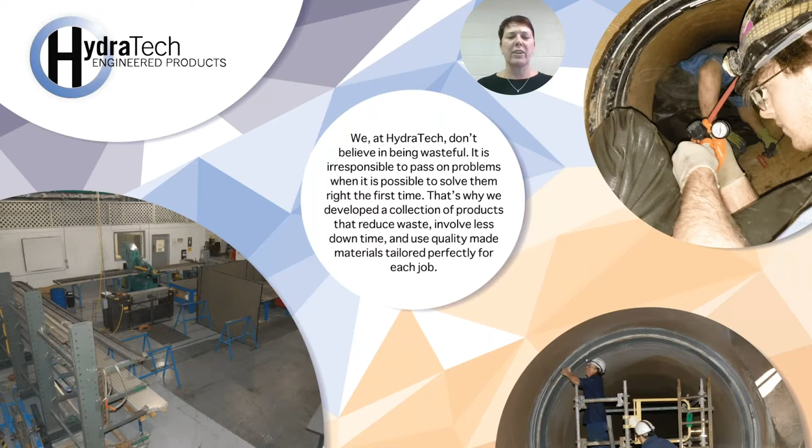So at HydraTech, we don't believe in being wasteful. We feel it's irresponsible to pass problems along when it's possible to solve them right the first time. That's why we've developed a collection of products to reduce waste, involve less downtime, and use quality materials tailored perfectly for each project. So today we're going to talk about the HydraTite seal.

So let's go over our agenda quickly. So first we're going to talk about what problem does the HydraTite internal joint seal solve? And what is the internal joint seal? We're going to then show a quick video on the installation, followed up by a slide that just hits the highlights. We're going to go over some examples, talk about some customized solutions, and then talk about a quick summary.

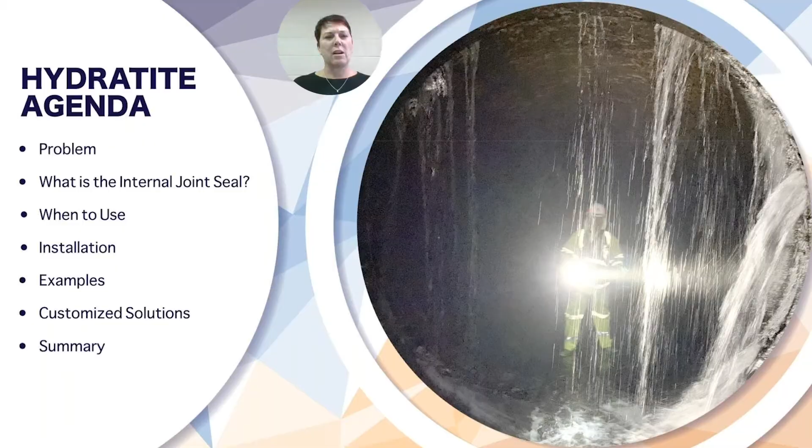So, problems. What does the HydraTite internal joint seal solve? First of all, offset joints and infiltration. Those typically come hand in hand. So when you have infiltration, you're washing soil and water from outside the surface into your piping system, which creates a problem. And then that can lead to sinkholes. And sinkholes are a problem for many municipalities, many state DOTs, and many systems. So those are problems the HydraTite internal joint seal can solve.

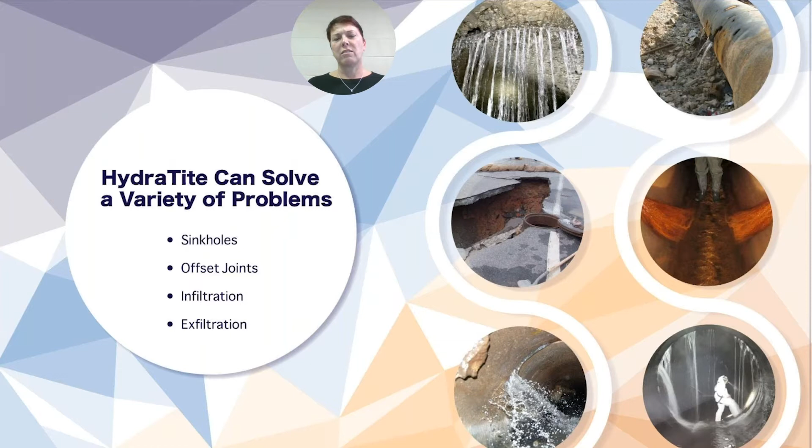Also, exfiltration. The upper right-hand slide shows exfiltration. You can see examples of infiltration by the 4 slides depicted in the slide as well. So what is the internal joint seal? Let's discuss this before we move forward.

The internal joint seal is a mechanical seal that has been utilized in trenchless remediation for decades. It is mechanical only. You would need to have structural pipe, solid pipe, in order to use this type of remediation. It has been around for years. It was originally designed and manufactured in Europe about 60 years ago. It was brought to the United States in the early 80s. So, with that being said, it has been around for a while and it is proven technology.

So what does the internal joint seal consist of? The internal joint seal is comprised of EPDM rubber and stainless steel. The EPDM rubber is available in 3 widths. You have standard wide, extra wide, and double wide. And that will be discussed in the next slide.

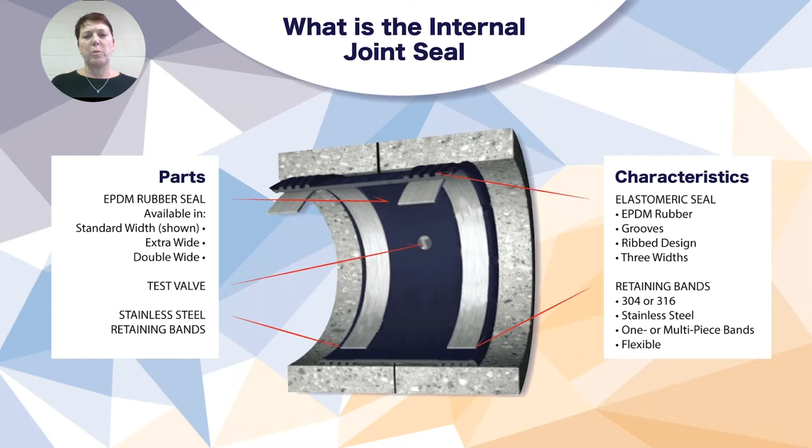It also has a rib design or grooves. And those rib tips are concave. And what that allows for is compression when the bands are compressed to the seal, and that allows for the seal to have a better connection to the host pipe. Test valves are also optional if you would like to have that included with your order. Also, the stainless steel retaining bands are 304 or 316 stainless steel, and they come in 1 piece or multiple piece and are flexible for installation.

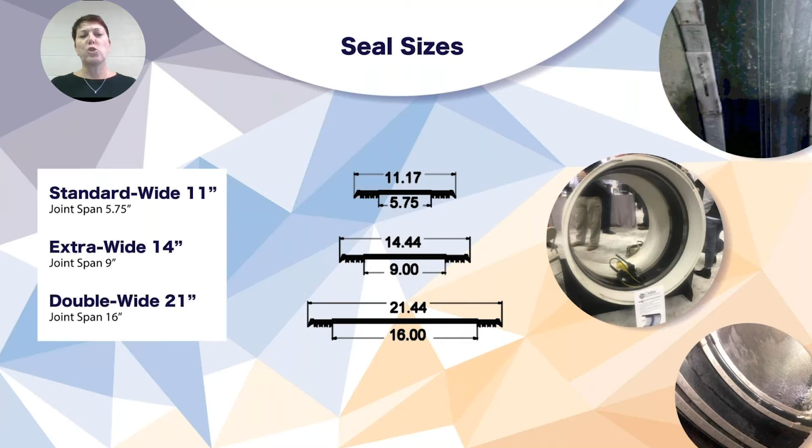As mentioned on the previous slide, we would discuss seal sizes. So the standard wide is 11 inches with a joint span of 5 3/4. That means that joint span would go over your joint or your area where you would need a point repair. Your extra wide is 14 inches with a 9-inch joint span, which again would go over your joint or area of point repair. And your double wide is 21 inches with a joint span of 16 inches.

So what size range can HydraTech accommodate? We can actually do 18 inches up to 24 feet. And the slide on the right shows you a 24-foot project that we just completed this past spring in Canada. And as you can see by all the scaffolding, what an amazing project that ended up being.

So some advantages of the internal joint seal: it is trenchless. So that means everything is done man entry inside the pipe. So that means no digging, no cutting, no restoration of grass, concrete, or asphalt. Everything again is done inside the pipe. It is customizable. Everything is manufactured at our facility here in Cincinnati, Ohio. So any size, shape, transition can be accommodated for. And it's nice that everything is also USA materials.

There's no hot work involved because everything again is manufactured here in Cincinnati, Ohio. All the cutting and welding is done in-house. And then when the crews get the final product, all they have to do is install using an expander, a pump, and basic hand tools. It does have a 50-year design life and service life, so it is a proven technology for 50 years.

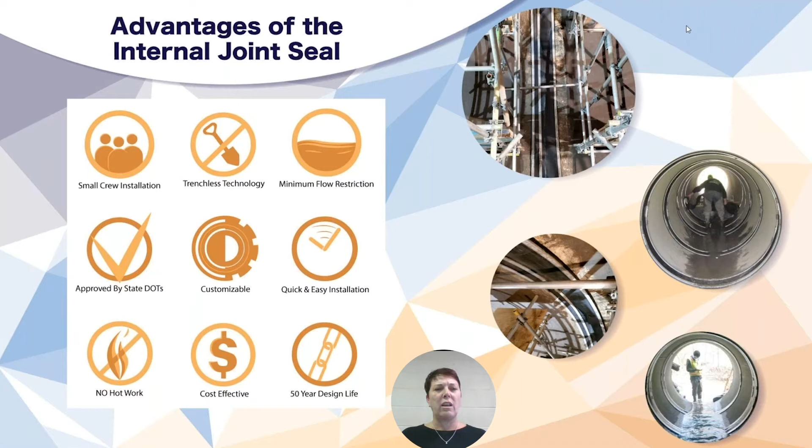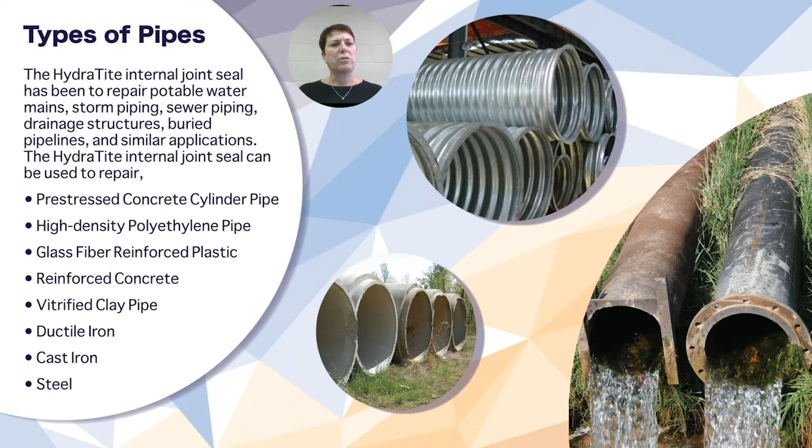It is approved by many state DOTs, and that list will be provided later on in the slideshow. So when do we use HydraTite internal joint seal? This is a list of the different types of pipe that the HydraTite internal joint seal can be used on. We have pre-stressed concrete, reinforced concrete, ductile iron, cast iron, and a variety of other pipe types. It can also be used on storm piping, potable water, sewer pipe, storm culverts, and various other types as well.

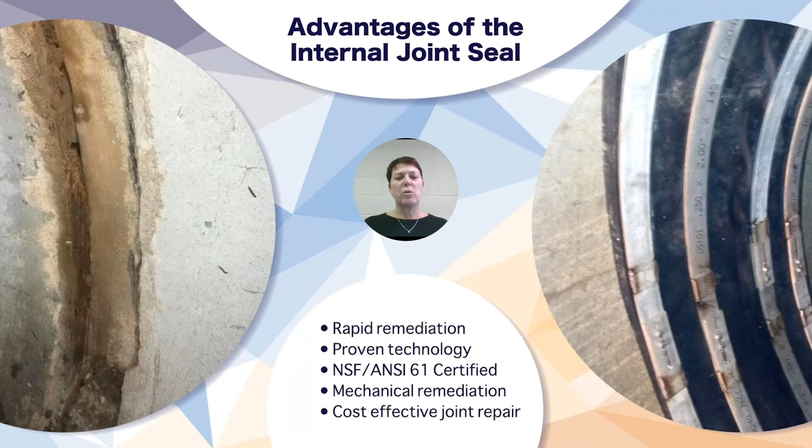So some advantages of the internal joint seal: it is rapid remediation. It's very quick. If you had 60-inch pipe, you would have a 3-man crew, one typically for confined space matters. With clean pipe and easy access, a crew could easily install 8 to 10 joints in a day. It is proven technology. Again, it's been around for over 60 years. It is NSF ANSI 61 certified, and it is mechanical remediation.

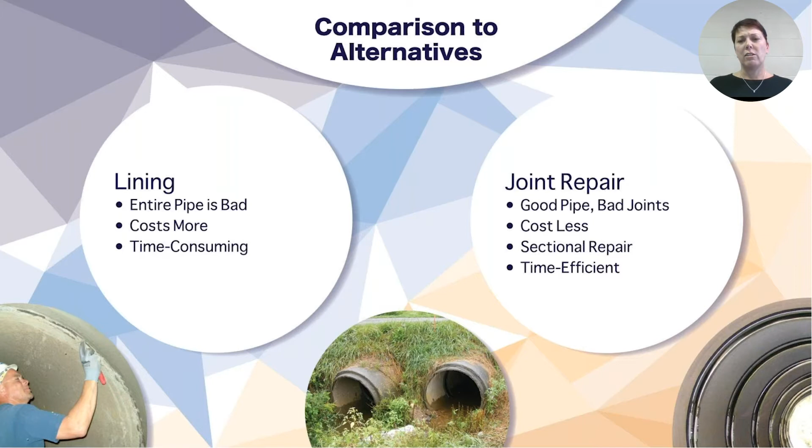So to compare this to alternatives, you would use the joint repair when you have good pipe and bad joints because it does cost less. You would line when your entire pipe is bad because it costs more and it's more time consuming. Joint repair can also be used as a sectional repair, and it's very time efficient.

Also, comparing to chemical grout, chemical grout is not a long-term repair method. It typically lasts 3 to 5 years, and it does cost more per service year. Another thing people don't know about chemical grout is it's not 100% watertight. Now, with the internal joint seal, it does have a 50-year repair method. It is a long-term repair method, and it costs less per service year. And not to mention, it's also watertight.

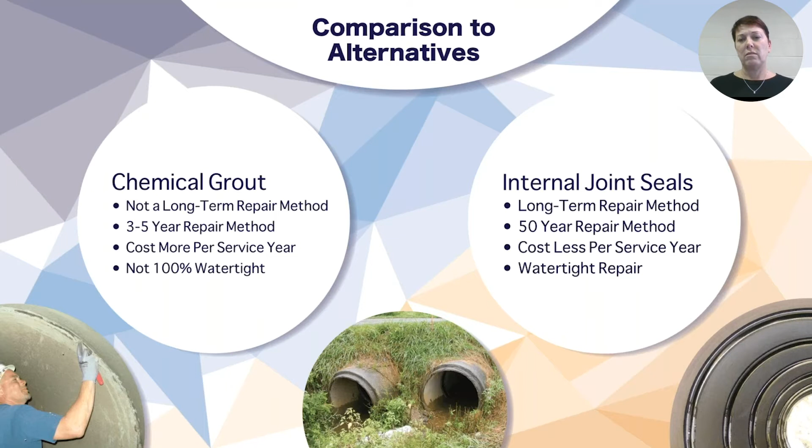So an example, comparing the internal joint seal 60-inch piece of pipe to chemical grout, these statistics are from 2020. If you have a service life of 5 years for your chemical grout with a $648 initial cost, that's $129 cost per service year. Comparing that to the internal joint seal that has a service life of 50 years, you have a $1,500 initial cost, which is $30 cost per service year.

So with that being said, the grout would have to be replaced every 5 years for 50 years, leaving it a cost of $6,480 compared to your $1,500 initial cost for your internal joint seal. So you can see how much more expensive chemical grout would end up being, and not to mention it's not watertight like the internal joint seal.

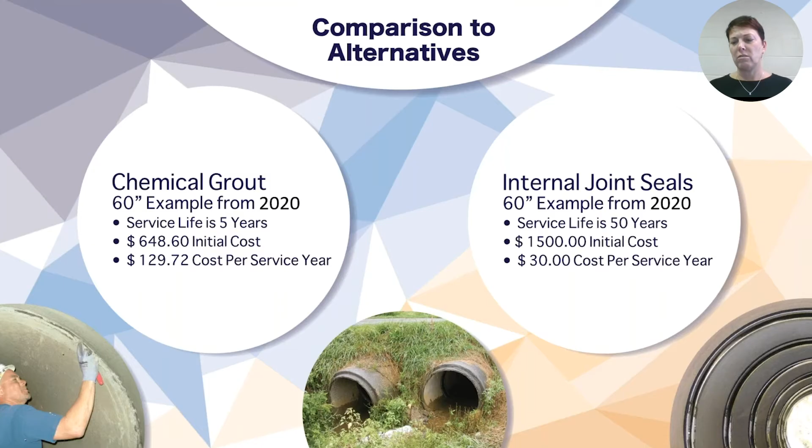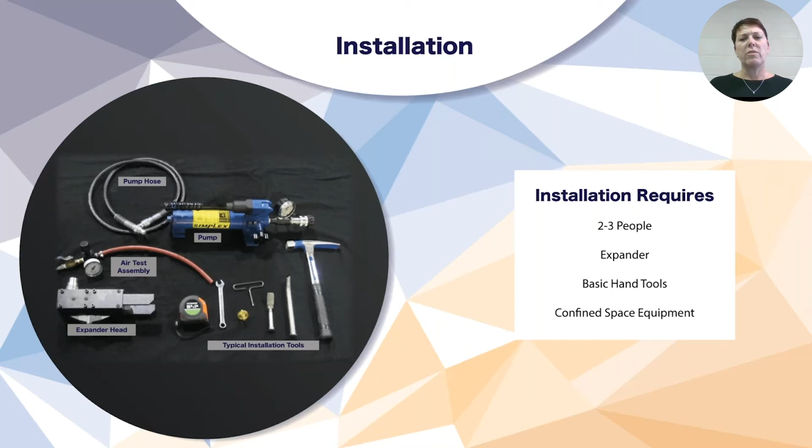So let's talk about installation next. Installation requires 2 to 3 people, mostly because it's confined space, 60-inch or less, and an expander, which you can see the expander there on the left-hand side of the screen. And it requires basic hand tools that you can buy from Lowe's or Home Depot. So now I'm going to show you a video that talks about installation.

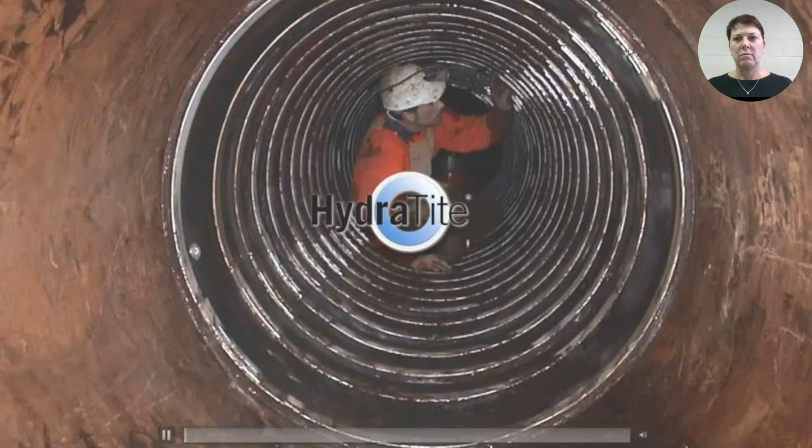HydraTite is an internal joint sealing system that offers customized mechanical remediation without expensive excavation. The HydraTite system offers a flexible mechanical trenchless repair with immediate return to service, minimum prep work, rapid installation with no hot work, and a design life of up to 50 years. With over 30,000 HydraTite seals in service, this technology offers a proven solution to the water, gas, sanitary, and power industries. The HydraTite system is a recognized method of joint repair by the AWWA M28.

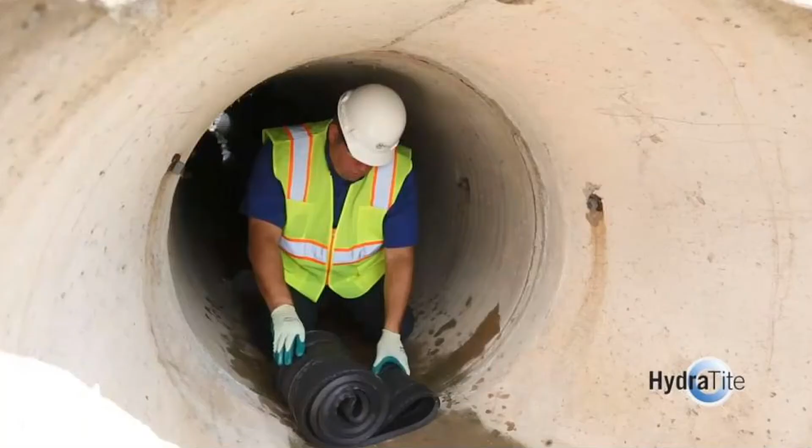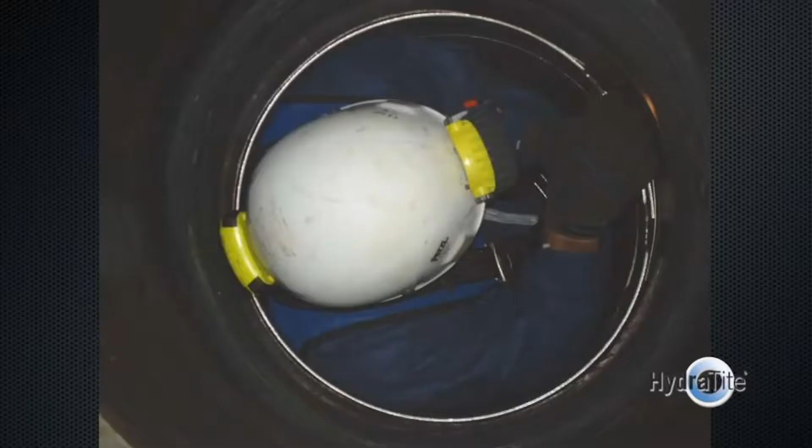The HydraTite system consists of an EPDM rubber seal, stainless steel retaining bands, and an optional test valve. The rubber seal is manufactured in one piece to match the internal diameter of the pipe. This system can be utilized in pipe diameters ranging from 18 to 218 inches. The seal is available in 3 different widths to accommodate a variety of joint dimensions: the standard 11-inch, the extra wide 14.5 inch, and the double wide 21.5 inch.

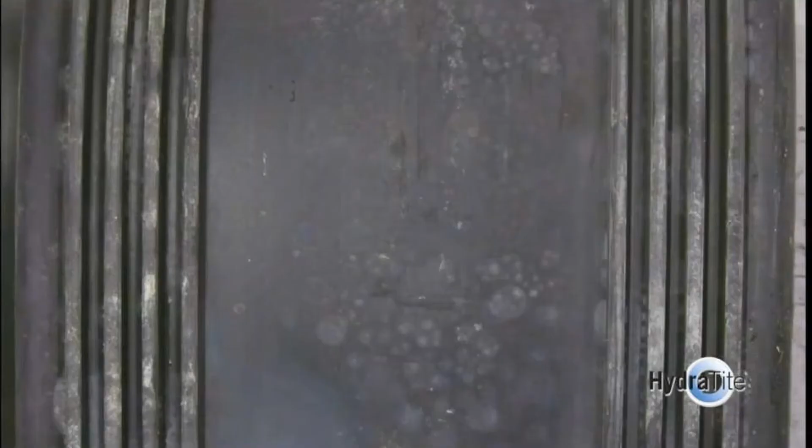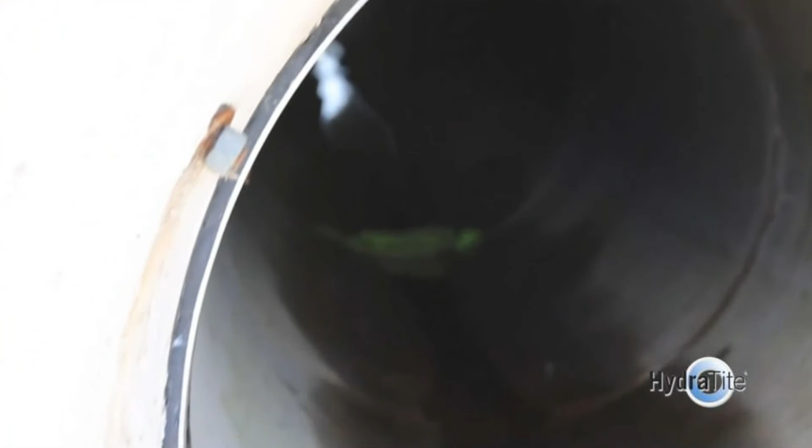HydraTite utilizes a rib design to ensure a watertight seal in the pipe. The EPDM seal incorporates groove channels to ensure proper seating of the retaining bands. Retaining bands are provided in one piece for small diameter pipes and multiple pieces to accommodate tight entries into large diameter pipes. The retaining bands are positioned on the seal, then expanded to compress the seal against the pipe walls. A wedge system is used to lock the retaining bands in place. This wedge lock system provides the greatest degree of flexibility while retaining the lowest possible profile.

As an option, the HydraTite seal is equipped with a stainless steel test valve to allow the installed seal to be tested for leaks before the pipe is put into service. Since installation is typically in pipes, installation equipment and procedures follow OSHA requirements for confined space entry.

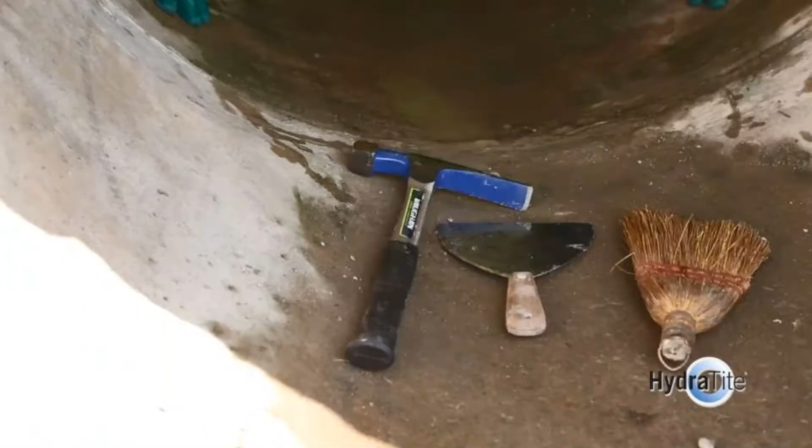Tools required for installation include the necessary tools needed for surface preparation, pipe lubricant, hydraulic expander, and an air test kit for seal testing, if applicable. The HydraTite seal is manufactured and installed in 8 steps.

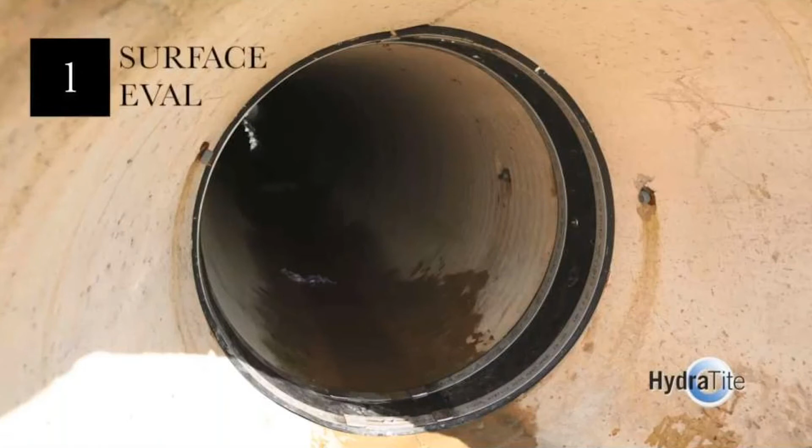The first step is to evaluate the pipe and operating conditions. Ask the following questions. What is the inside dimension of the pipe? What process fluid is flowing through the pipe? Is it a pressurized pipe or a gravity pipe? What is the gap in the joints or area of the joint repair? What is the surface of the pipe? Is there a significant offset in the pipe joint, and what type of access is required?

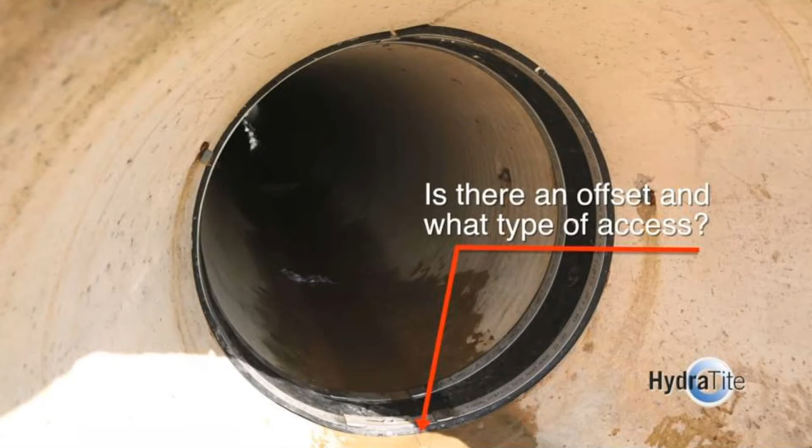This step enables the seal to be manufactured correctly. It defines the diameter of the seal, width of the seal, amount of bands required, material of the system, type of surface preparation required, and if the seal requires more than one-piece bands.

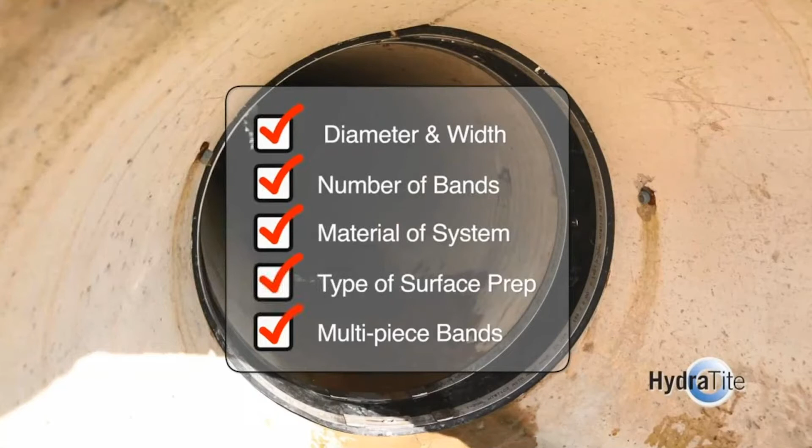The second step, once the HydraTite is manufactured, is to prepare the surface. The surface area where the joint is to be installed should be cleaned to ensure any loose debris, scale, or corrosion products are removed. The intent of the cleaning is to have a smooth, stable surface so the rubber will provide a good seal.

The third step, once the seal assembly has been loaded, is lubrication. The HydraTite seal, in many cases, needs to be lubricated on its sealing surface to assist in adjusting the rubber at the joint. Make sure the seal is parallel to the joint. The fourth step is to install the retaining bands in the grooves of the rubber seal.

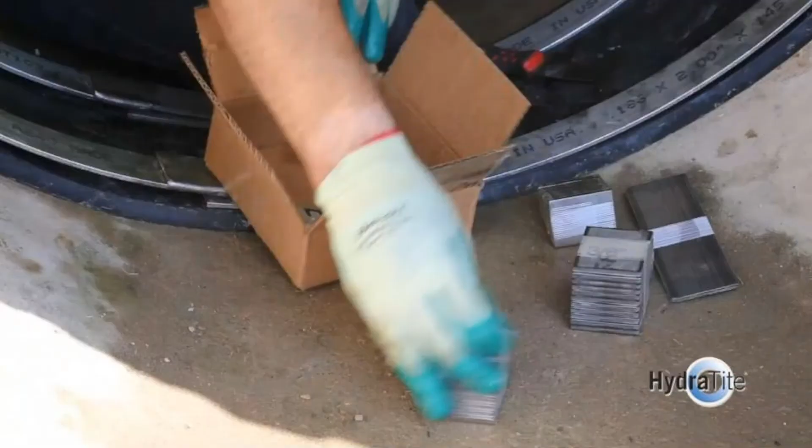The fifth step is to expand the bands. The bands have 4 main areas: the push tab, the ear, the shim, and the wedges. The expansion tool expands the push tabs and the ear, making the retaining band's diameter larger and compressing the rubber. The shim is installed between the band and the rubber before expansion so the wedge can be installed.

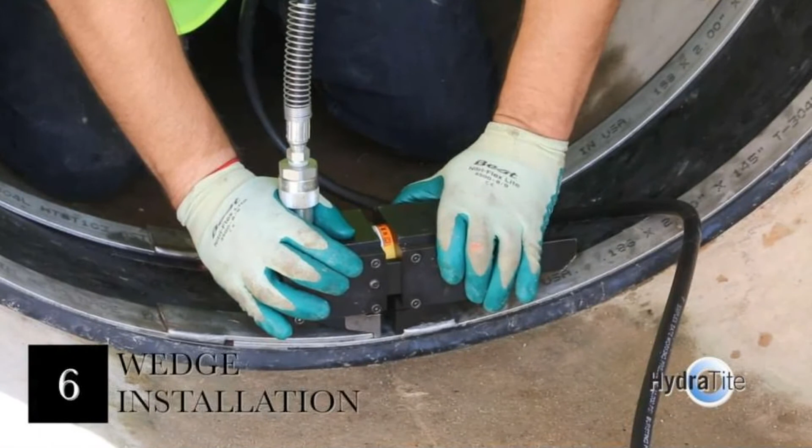The expansion process is determined by the pump's pressure, which is limited by the HydraTite procedure. This pressure is dictated by the thickness of the bands and diameter of the pipe. The sixth step is wedge installation. The wedge is installed at the gap provided by the expansion process. The size of the opening is measured and the appropriate wedge is selected.

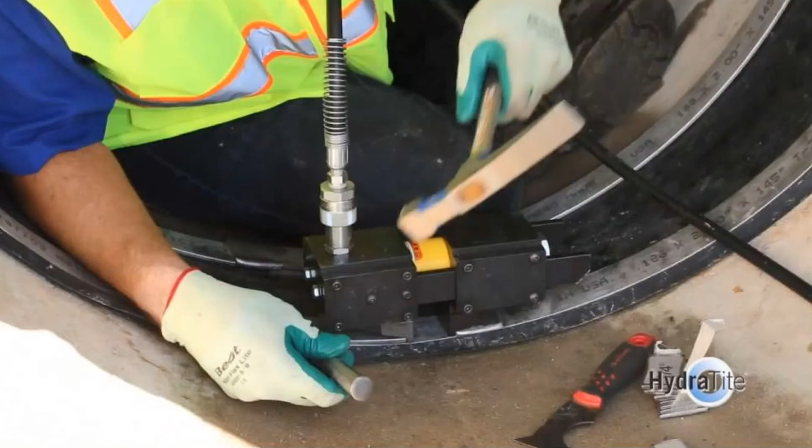The wedge is then inserted into the space provided. Wedge insertion is generally performed by a brick hammer. The size of the wedge should be slightly more than the opening available. After the wedge is installed, the expander is removed. The seventh step is to re-expand the bands after 30 minutes, because the rubber may flow or creep, causing the bands to relax. If after re-expansion the gap size has increased for the wedge, a larger wedge must be installed.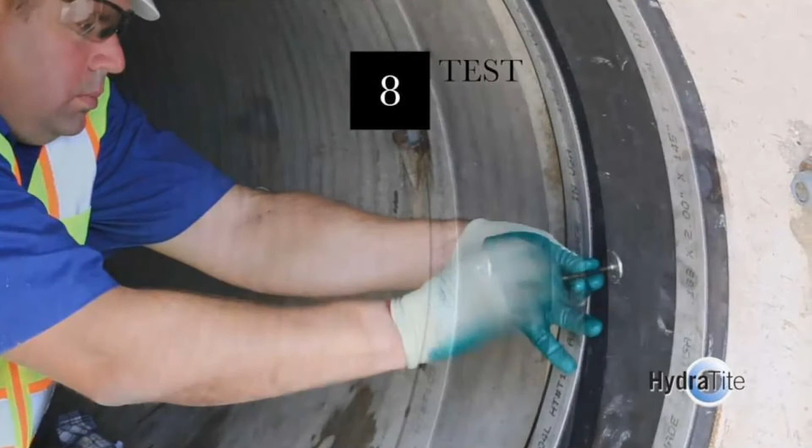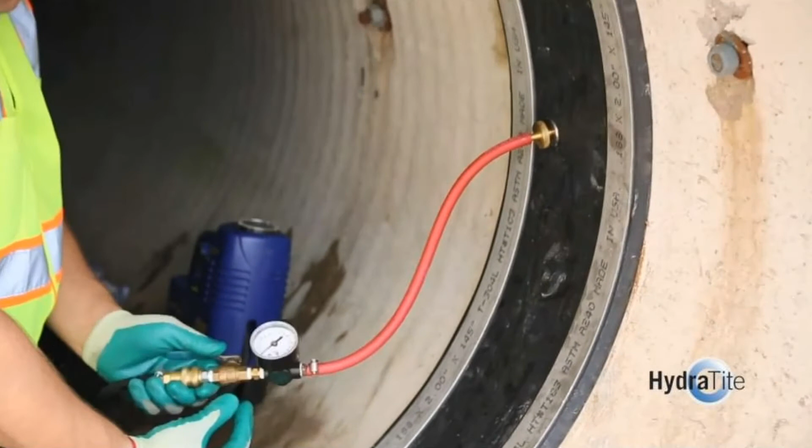Remove the small test plug fitting, located in the test valve, and insert the threaded connector and hose attached to an air supply. Pressurize the back of the seal to 5 psi. The seal should expand outward or balloon. If there is a large opening in the joint, it may not be possible to back pressure the joint.

While the seal is pressurized, use a solution of soapy water to spray around the edges of the seal to detect any leakage. On the rare occasion leakage is detected, determine the cause and fix the situation, which may include additional surface preparation and re-expansion of the seal. Remove the test hose, depressurize the seal, and replace the test valve fitting.

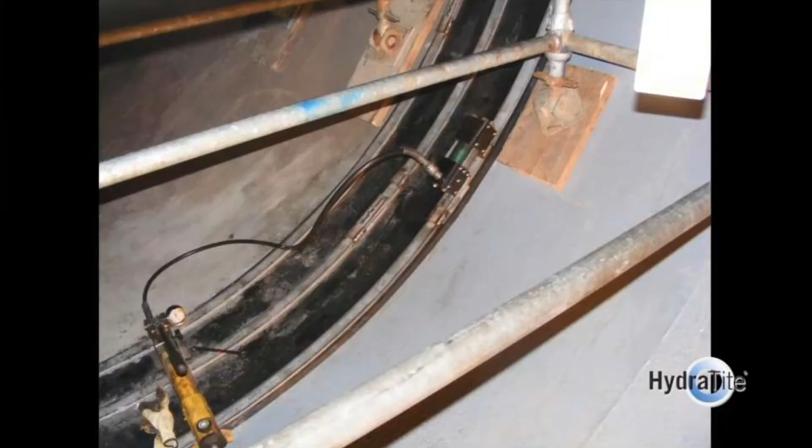Multi-piece bands are utilized in larger seals and for seals that have pipe access limitations. Unlike a one-piece band, the multi-piece bands consist of ears that are slotted and fastened with 2 bolts. Multi-piece bands provide for more expansion points and flexibility in the expansion process. This process can be used to stretch the rubber where 2 pipes have a different diameter. Examples include concrete to steel joints and cured-in-place liner end seals.

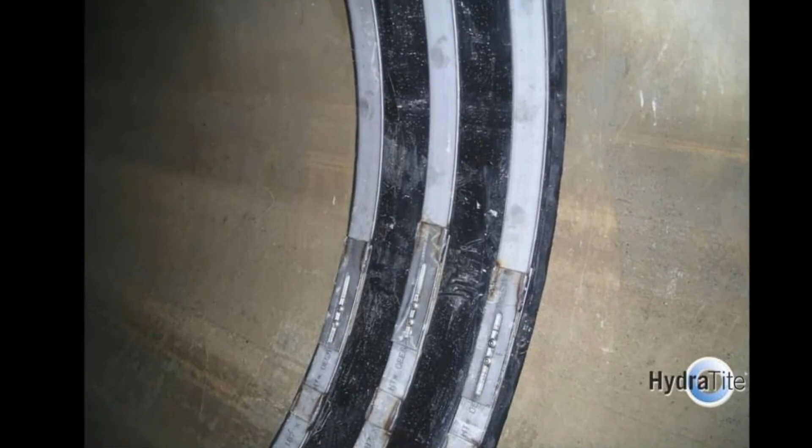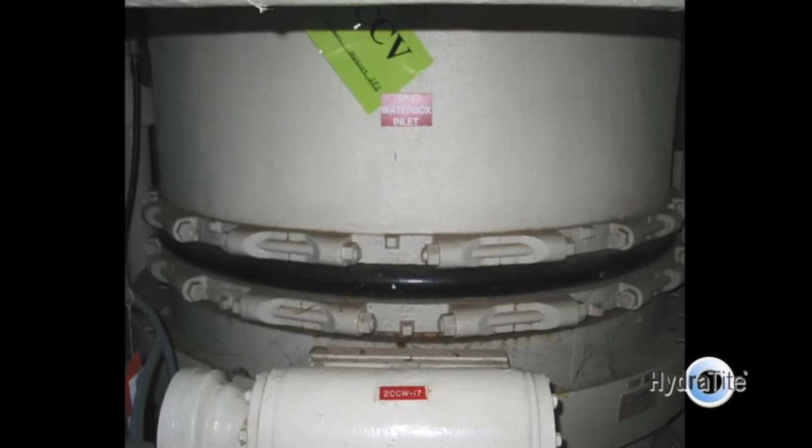Additional bands can be used to provide reinforcement in the center due to head pressure. The backing plates can be utilized in pressure pipe situations to provide a structural backing without the seal backing being extruded through a void. The HydraTite seal is also used as an internal slip joint to allow movement and replace expansion joints in cooling water systems.

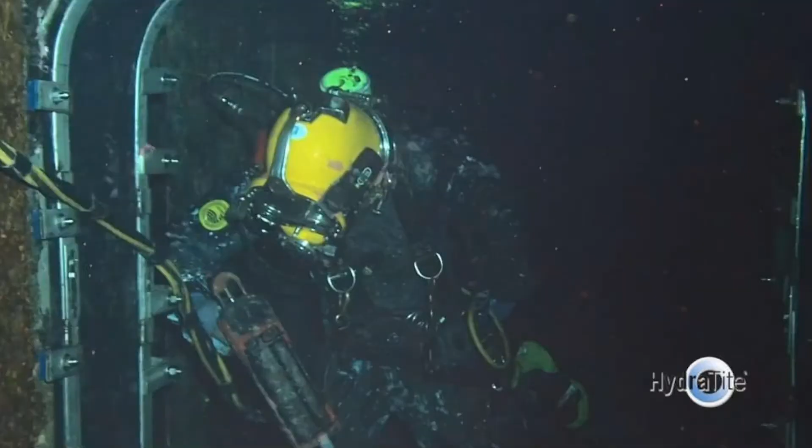The seals can be interlocked to span long lengths of pipe. This interlocking technology allows the seal to span over longer lengths of defects in a pipe. The HydraTite seal can be used in unique shapes, such as in elliptical piping, as well as box seals. This flexibility makes HydraTite an economical solution. When it comes to sealing almost any size or type of pipe, HydraTite is economical, effective, and dependable.

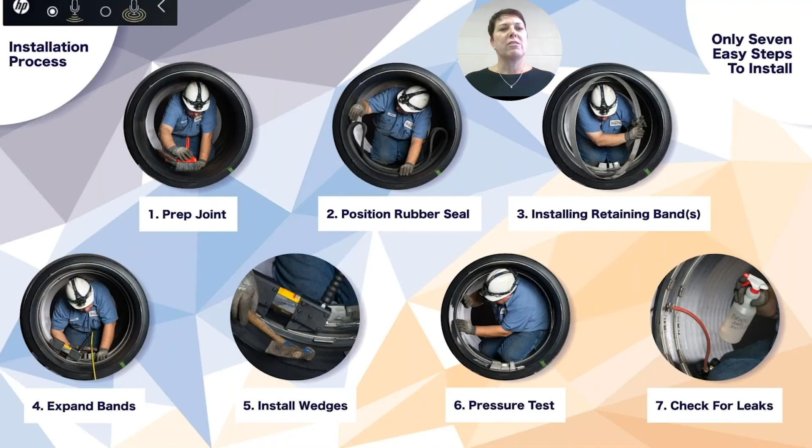So that video shows you the installation process. This screen is just a quick review of the video. So the first thing we do, as we learned, we have to prep the joint, which is quick and easy, just requires a little hand broom or wire brush to make sure the joint is clean. Then we position the seal. After the seal is positioned, we install the retaining bands. And again, as we learned, those are 1-piece or 2-piece, depending on pipe size and access to the pipe.

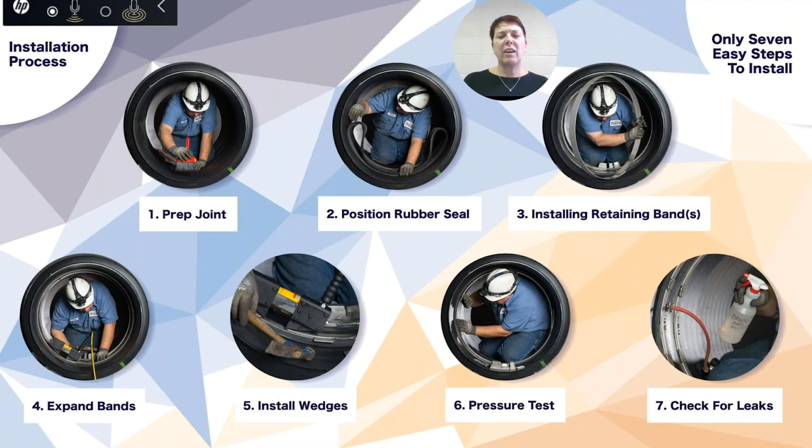Then we use the expander and we expand the bands to a certain PSI, which is based on the pipe specifications. And then we install the wedges after the bands are expanded. And then after that, we do a pressure test, check for leaks, and the HydraTite seal has been completed and installed. So we're going to go over some examples right now.

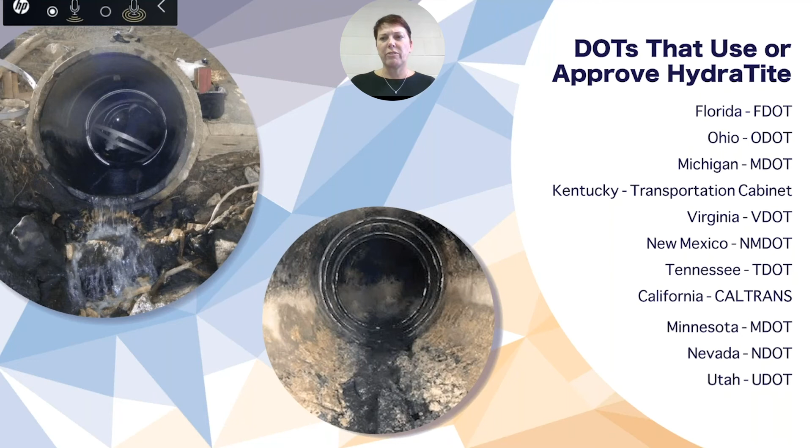These are the DOTs that have used or approved HydraTite. As you can see, it's a variety anywhere from Ohio to California. And we've worked in many of these states. So we'll go over some different pictures of before and after shots from some of these various DOTs.

Here's Michigan's Department of Transportation. You can see a before shot on the left-hand side, on the bottom left, you can see a leaking joint. This project was done under I-94 on Michigan's highway system. It was 114 72-inch seals that were completed in 3 weeks.

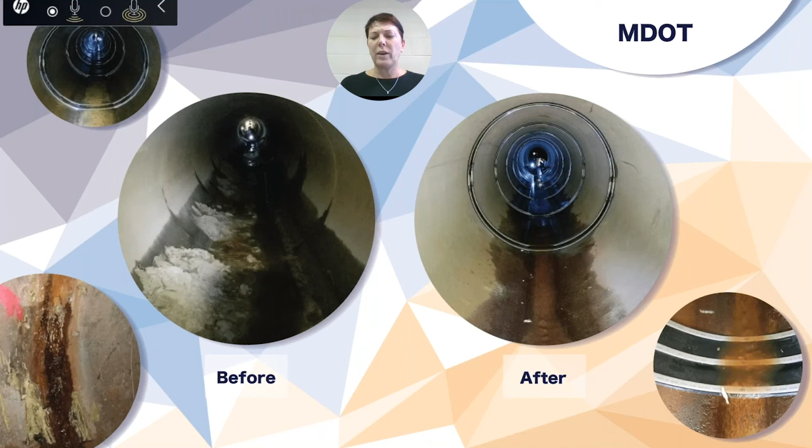This is a nuclear power plant in California, and what this consisted of was doing a repair. It's a 48-inch line that was recirculating. We did the repair utilizing a backing plate as well. You can see the joint on the left-hand side before and on the right-hand side after. So that shows you what that project looks like.

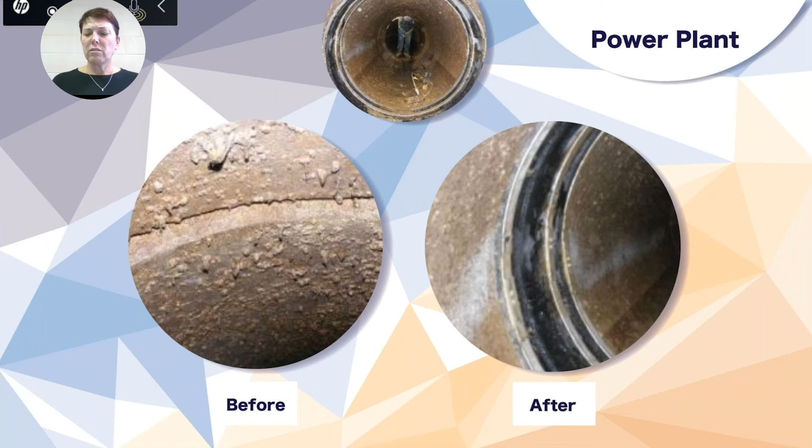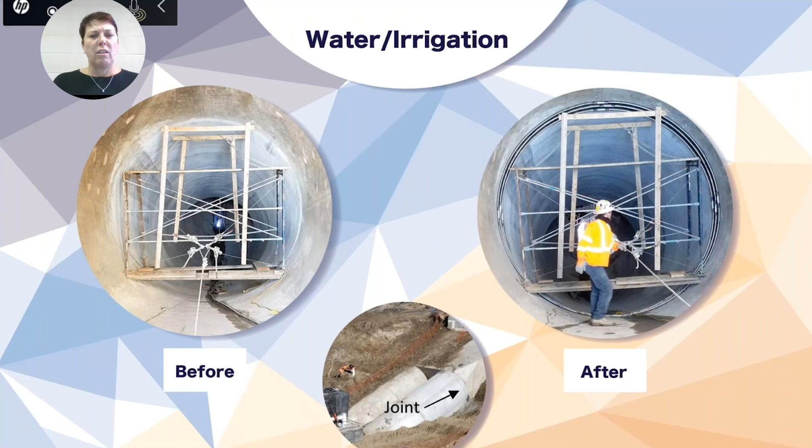Here's the water irrigation line. This was also in California. You can see before, this was 13 feet. We did 2 of these seals on reinforced concrete pipe. You can see the magnitude, the scaffolding that was used. On the bottom picture, it shows you exactly where the joint was.

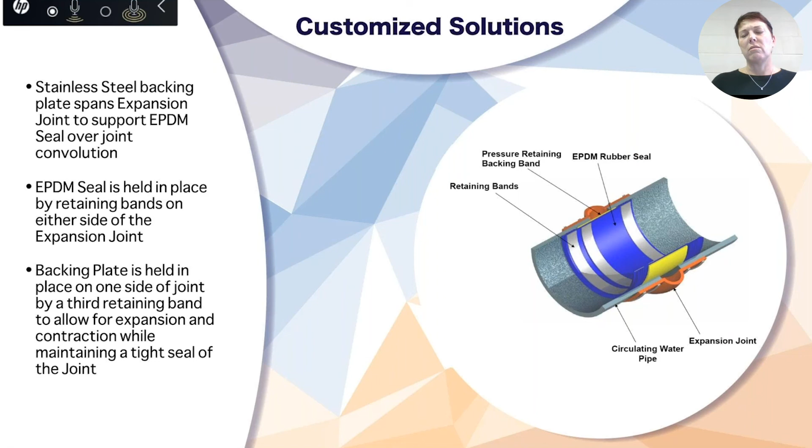So now we're going to move on to some customized solutions. Stainless steel backing plates are often used on pressurized pipelines. You have your expansion joint, and so the backing plate is put in behind the HydraTite seal to accommodate when that expansion joint compresses and releases. So that's essentially what the backing plate's for. You typically use 3 bands to hold that backing plate in place, and then as it expands and contracts, that allows that EPDM HydraTite seal to expand and move with the expansion joint.

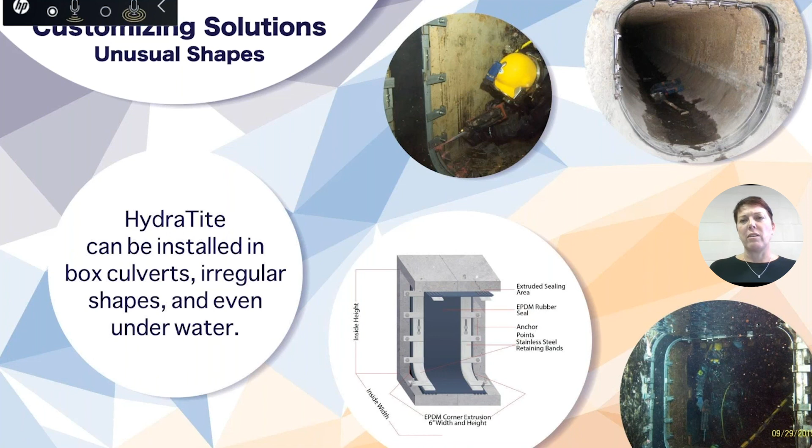Another customized solution is unusual shapes. We can do box culverts. Also, you see an unusual shape up there on the right-hand side of the screen. We can do elliptical. We've also worked with diving companies so we can install different shapes and box seals and items of that nature underwater. So we're able to do all of those different things since we do manufacture everything at our facility here in Cincinnati, Ohio.

Another customized solution is called sleeving. That was mentioned earlier, when you take several seals and they can be interlocked together and create a sleeve. It's nice for when you have a point repair and you don't want to go into full length lining. So you can take a sleeve and it can go on in length as long as you need to fix that point repair.

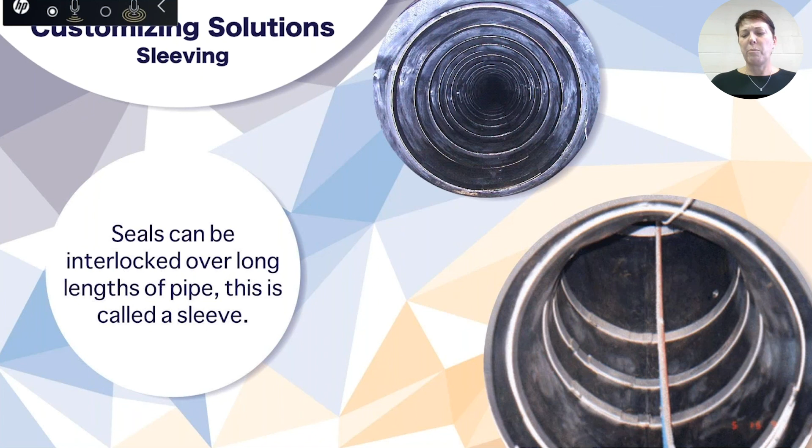So in summary, we've learned that when the pipe is structurally sound but has damaged joints or has an area where you need a point repair, the HydraTite internal joint seal is the way to go. We've also learned that it's a trenchless method of repair. It requires no hot work and it is quick remediation. It's extremely cost effective. It has been around for many, many years, and it does have a 50-year service life.